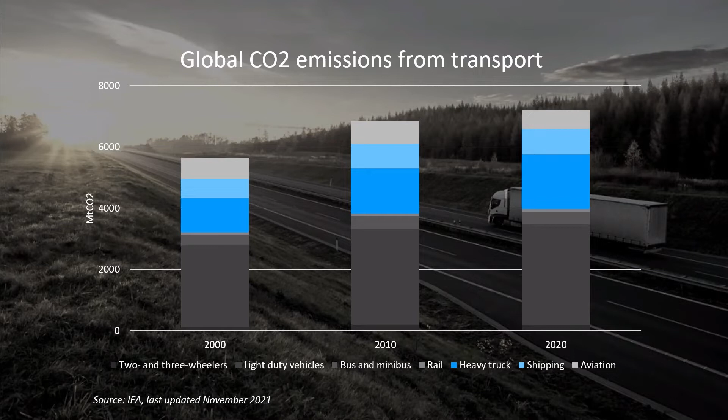The choice to go for bio-LNG has mainly to do with the global CO2 emission. We want to decarbonize the heavy duty transport. What we see more and more is that heavy duty transportation, especially in the maritime and long haul road transportation sector, is very hard to decarbonize. If you look at the CO2 emission for transport, it is increasing, so we have a job to do here.

Looking also at the outlook, we're strengthened by the Gas for Climate report, where we strongly believe that biomethane itself will have a big role to play in heavy duty transport. This also shows that hydrogen, but also biomethane, as a power or in the industry, has a role to play. So I think that bio-LNG itself will get a good place amongst this long-haul transportation.

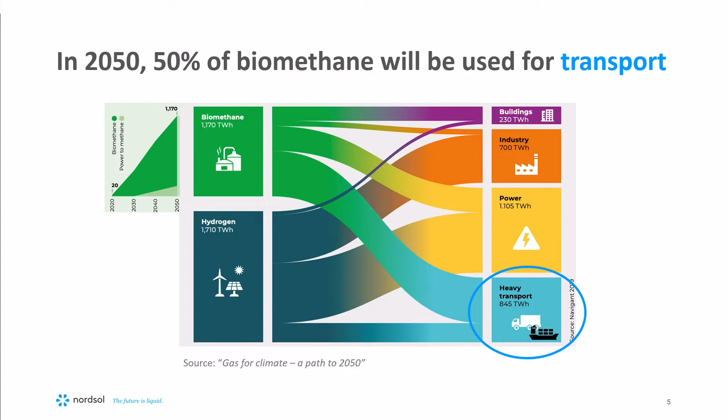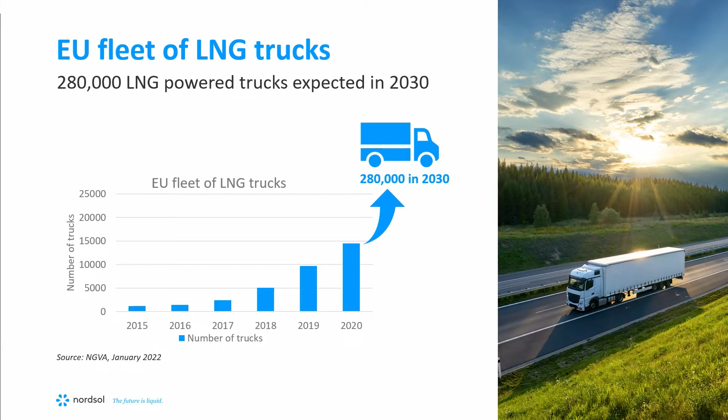Looking a little bit at the fleet on the EU side, we are seeing an increase of LNG trucks. To be honest, there was a little bit of a dip, as the previous presenter already explained with the gas prices, but we still see development on LNG trucks, but also on LNG stations. So the growth figures you see now are slightly delayed, but we still strongly believe that LNG will pull through as a good energy carrier for this.

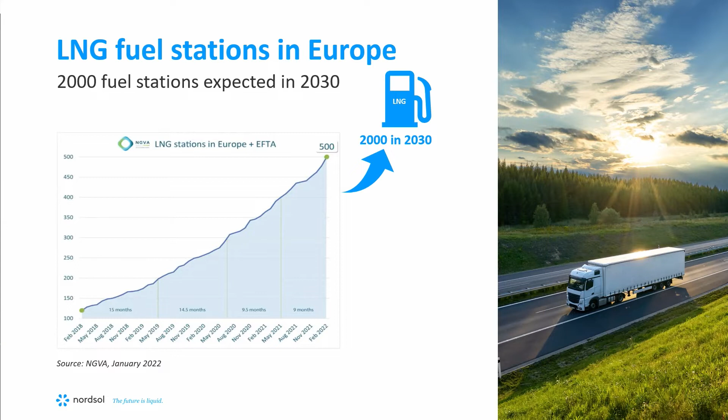And not only on the road transportation, but also in the maritime sector, we see companies like CMA CGM, Hapag-Lloyd, still ordering LNG vessels ready with this dual fuel purpose. So the LNG demand, but also the bio-LNG demand, and the need to blend in renewable fuels in the sector, are still really important topics.

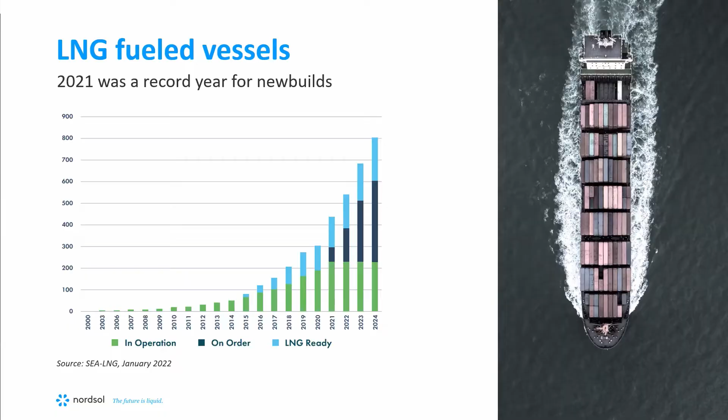This also strengthened us to continue with this decentralized bio-LNG production. What we want to accomplish as a company, the first part is making bio-LNG mainstream. We strongly believe that bio-LNG has a major role to play in the energy transition. And we foresee that the route to bio-LNG, as we presented it here, is a true circular economy.

So our first project in Amsterdam, where we receive the biogas from Renewi, which is a waste company. They collect food waste. What we do there is take in the biogas from the food waste company. We produce the bio-LNG. In this case, Shell is taking off the bio-LNG and putting it into their existing customer network, which is also related to the food industry again.

So what you can see here is a local decentralized economy of food waste to biofuels and then to the trucking industry again. And we also liquefy the CO2. This goes to greenhouses and dry ice production in the area. So hereby we can say that all the products are in a local circular economy.

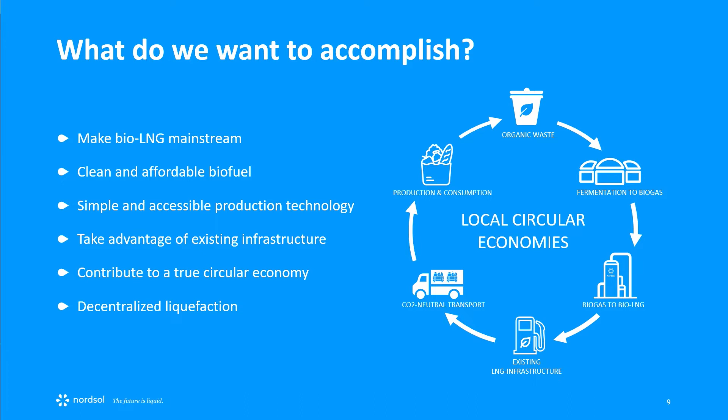A little bit on how we do that. In principle, the technology itself is not new. Liquefaction of natural gas has already been there for a long while. However, there are some big differences which make it interesting to explain a little bit how we did the first technology, or the first plant, in Amsterdam.

So basically we build up the whole system from scratch. What you can see is that LNG from natural gas is normally from the big sites, Qatar, the US, Angola, where gas is a relatively cheap source because it comes out of the ground. In addition, it also has quite a complex gas composition, so you have to think about higher hydrocarbons, not only methane but also ethane, butane, etc. And we're talking about heavy metals originating in the earth - for instance, mercury is a difficult one.

On the other side, biogas is a quite pure gas - we only have methane after the upgrading, and it's a relatively simple gas composition. Of course, you need to remove some H2S, ketones and terpenes, but in general it's a nice clean gas. However, it's also quite expensive to get it because you of course require a biogas site, the feedstock, and the separation part.

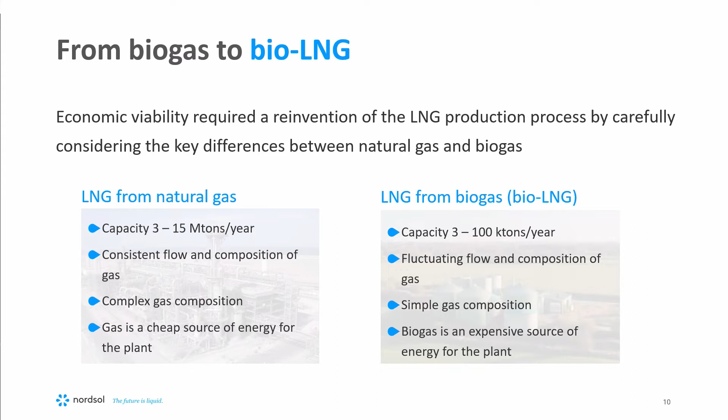So what we did is we tailor-made, let's say, the first bio-LNG plant in the Netherlands on the following concepts. We wanted a high energy efficiency plant, because for us the gas and electricity bill is not for free, so we need the highest energy performance we can get. We need a plant that is easy to operate and also doesn't require a lot of maintenance. So we reduced the interfaces and we are now running unmanned - the plant in Amsterdam does not have any operators on site. Of course there need to be some checks and visual inspections, but in general the plant runs unmanned.

And in order to have the highest carbon footprint reduction, we want a zero methane slip. This was possible through the integrated CO2 liquefaction site. So we liquefy all the CO2, and the remaining methane, which is still originating in the CO2, we strip off and recycle back to the LNG. So there's actually no methane going into the air at the plant.

And like I said, we needed a cost-low impact plant, because if the investment cost runs too high, the business case for small scale and nanoscale bio-LNG will not fly - it becomes basically too expensive. So we require a cheap investment. And of course we want the best possible bio-LNG quality, and I can say this has been verified by Shell in the Netherlands - they are very satisfied with the quality, as it consists nearly of pure methane.

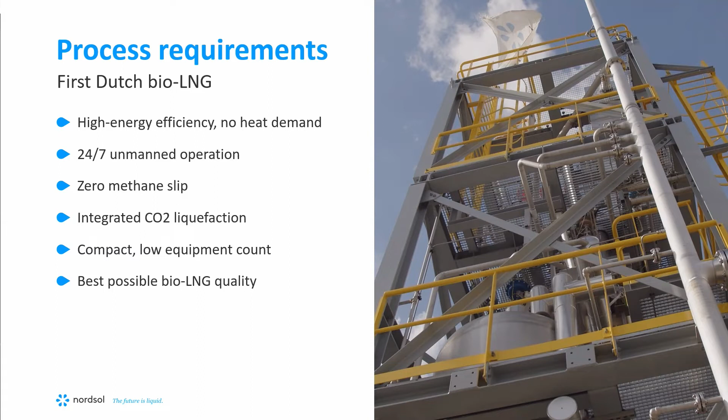So going a little bit into the technology, explaining what we did differently in our plant than the traditional liquefaction sites - as Nordsol, we are taking up from the raw biogas. So we don't intervene with the biogas producers or production sites. We are not knowledgeable about feedstock; we are really good at starting from raw biogas.

So we do the pre-treatment - we remove some water, some sulfur, and other volatile components. Then we start with the integrated technology. What we did here is the upgrading, which is done by membrane, where we separate the CO2 from the methane, and the methane is then liquefied, stored, and offloaded.

On the other hand, the CO2 is going to the liquefaction container, and there we liquefy the CO2. Any remaining methane on the CO2 side is recycled back to the upgrading, and also remaining CO2 on the biomethane side, because CO2 will crystallize if you liquefy it together with biomethane. So that's why we also needed to remove all the CO2, and it's also rerouted back to the bio-CO2 liquefaction. So in this case, the integrated technology is also part of getting the optimized footprint. I'll explain later why this is really important to also have a good bio-LNG price - so bear with me there.

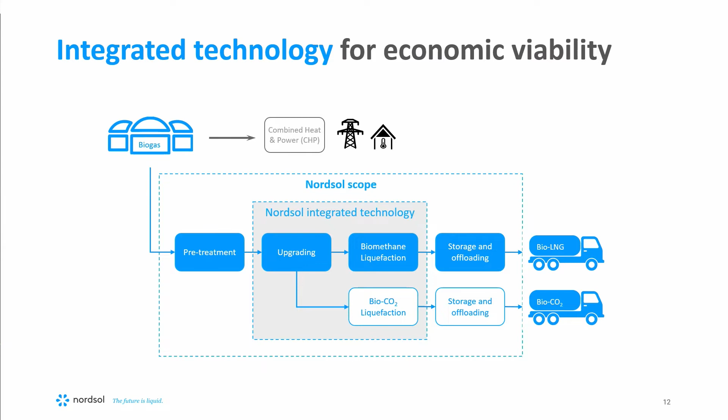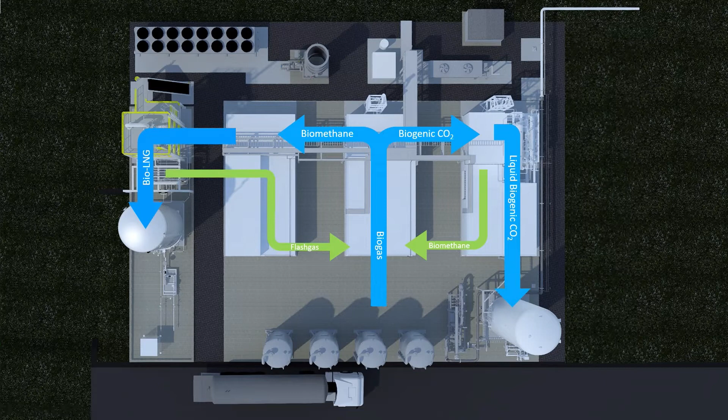So, some distinctive features. Normally, if you go from biomethane, from your membrane step to bio-LNG, then everything will freeze up because there's still 2% CO2 in. What we did actually is develop the technology which we called flash to sweep. In this container, there's an additional membrane step that sweeps out all the CO2. Normally, membranes can't achieve that performance of low ppm CO2.

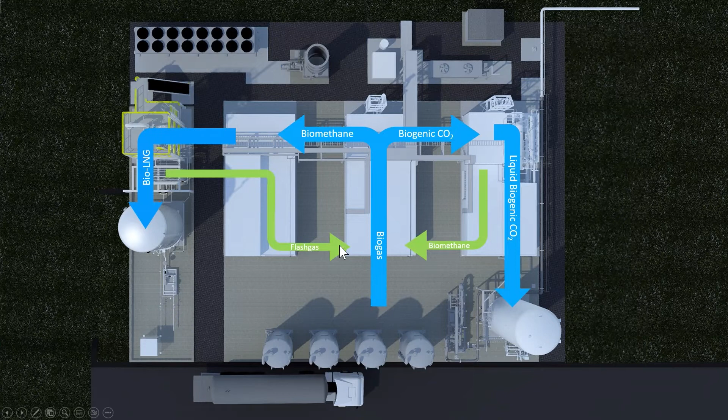However, what we did here is reroute the flash gas to our membranes. So you have the incoming biomethane with some CO2 still in it, and the flash gas is run countercurrent with the membrane sectors. This flash gas has the function to sweep out any remaining CO2 still in the biomethane. At this point, we can clearly state that the methane is roughly 50 ppm CO2 and no water.

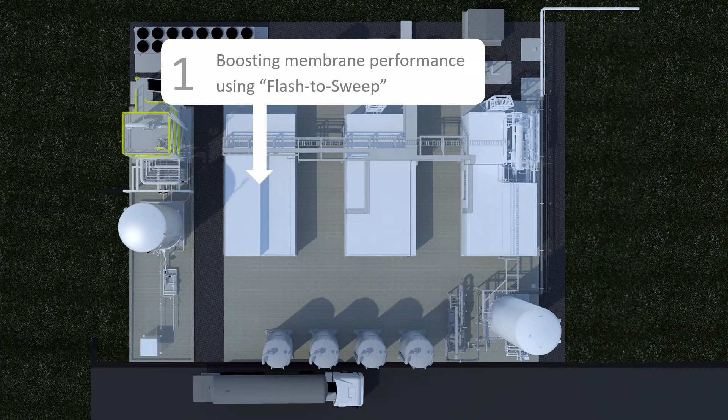And no hydrogen anymore, though there's also a little bit of hydrogen in the gas. At this point, the gas is ready for liquefaction, and we don't need a pressure swing adsorption unit for the polishing or other technologies. So we can go directly from membrane technology to liquefaction. It actually makes life much easier, as a PSA unit has its own interfaces and also requires some regenerative gas. So it saves on energy, but also saves on equipment count.

Then we have chosen for the liquefaction cycle, no phase change in the heat exchanger. It becomes a little bit more technical, but basically the advantage here is that we don't have any liquid formation in the cryogenic heat exchanger yet. This is a common problem in the industry, where if remaining CO2 particles or other particles freeze up in the heat exchanger, it will block the system. So you have to stop production, and of course, if you stop production, it will cost money.

So what we did here is have a separate guard vessel, we call it a guard vessel, at the bottom of the tank where we allow for some solids to form. Normally the biogas fluctuates a little bit in CO2 composition, but also in flow. This helps us, having a guard vessel at the end of the process, to make sure we don't get any clogging and also have good bio-LNG quality.

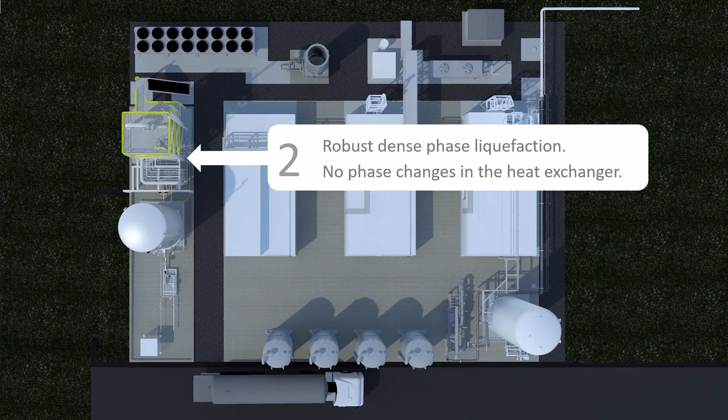Normally you need a refrigerant in your process. You can imagine that if you want to cool down your biomethane all the way to minus 150 degrees, you require some refrigerant. What we did here is use our own treated methane, and the cooling loop is run by our own methane.

We don't consume it, that's a clear statement, but we borrow a part to fill the cooling loop, which is a closed loop used to cool the incoming biomethane. There are benefits to this: if you cool methane with our own methane, you have low energy consumption, and you don't need a mixed refrigerant or nitrogen to do the cooling. So it also saves on equipment, makeup, and consumables on the refrigerant side.

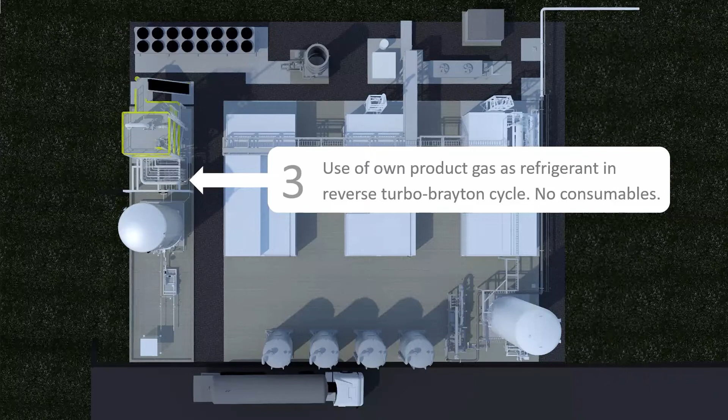We have this three-phase separator as a safeguard, or the guard vessel, which makes sure we can buffer the bio-LNG for a short time. But also if the analysis equipment says the bio-LNG is not at spec, we can evaporate some more off, making sure at this point we can always have a quality check on the bio-LNG. This is important to maintain the right quality for the off-taker and the right quality of bio-LNG for the trucks and the engines.

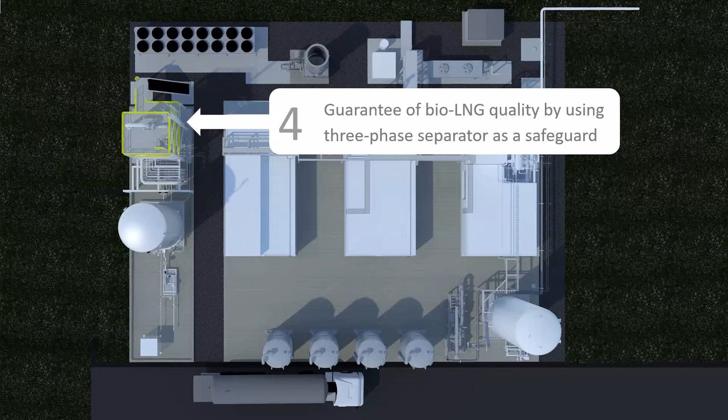Finally, what I already mentioned a little is that we have on the right the CO2 compressor, which allows us to recover all the methane and liquefy the CO2 in the process. So in this compact space of roughly 30 by 35 meters, we can do the whole technology. You can see it here in real life, the plant from above.

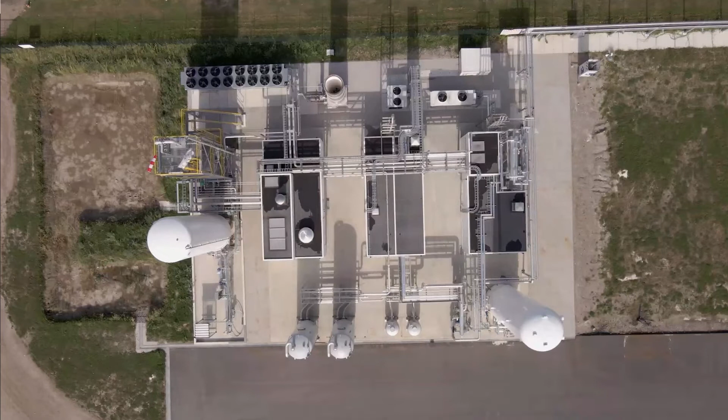You see it's modular based. You can see the containers are split in two, so one part is road transportable, and then in the end you bolt it together. All the items you can see here are built up modularized, and we built the whole site in 2-3 months' time.

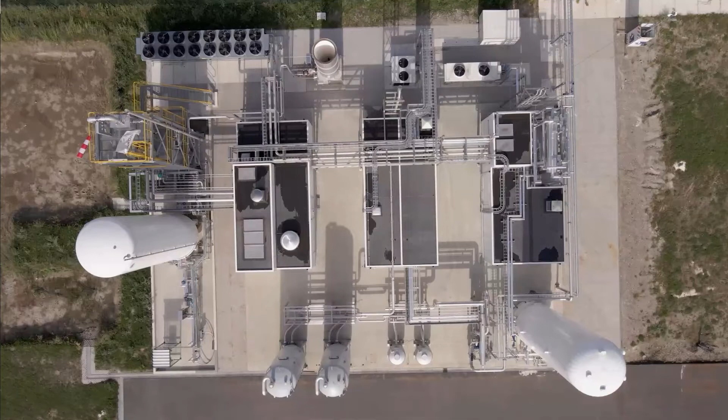Then something about the price of bio-LNG. This has already been touched on in the last presentation. The interesting part of bio-LNG pricing, at least as we encountered it in the Netherlands, is that in every country you see different mechanisms. As the EU, we have the legislation of RED II, and there's a scheme called ISCC where we can certify these kinds of calculations. However, we realize that in every country there's a different force at play, different legislations, and sometimes different interpretation of the RED II or ISCC calculation.

What I'd like to show here is that in the Netherlands, how we do it at the moment is we have a floating contract based on the TTF price, the Dutch gas price, which is basically the fossil LNG price. This is nothing else than the gas price—you can also look online at the gas markets, and we also had the spike.

Then there is what we call a marketing premium. We noticed that off-takers are willing to pay something extra, customers are willing to pay something extra to have the bio-LNG. We got a lot of questions from people saying, hey guys, can we buy some bio-LNG from Amsterdam? And every time the answer is no, because there's no open market for bio-LNG yet.

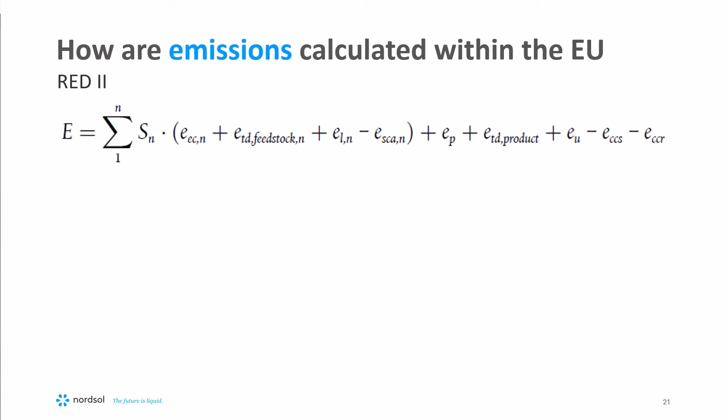So to go a little bit deeper on that, actually the calculation within the EU on the RED II—in Germany, the schemes already apply. So then you talk about the 5 points, which are all in grams of CO2 equivalent per megajoule. You can see here that the total emissions, so your carbon index score, is determining your green certificate price.

And then it becomes interesting because the price per ton avoided, for instance in Germany, has already been up to 400 euros per ton. I think somewhat higher, in the past somewhat lower. But this is quite a big chunk.

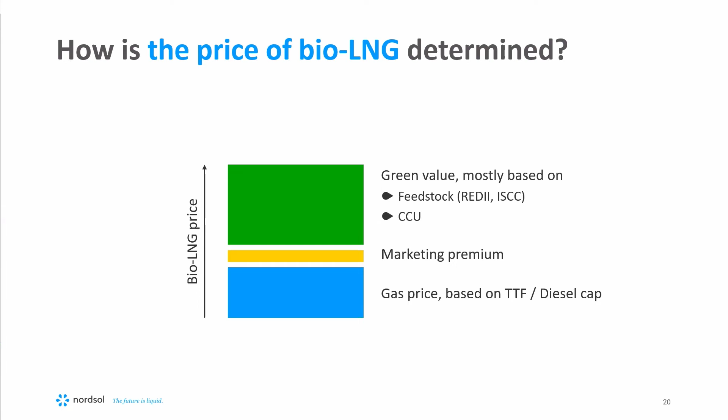So to explain a little bit further, if you have the right feedstock according to the RED II, manure has the highest valuation on this calculated emission score, but food waste as well. So if you use energy crops, you will get a lower score, so also a lower price on your bio-LNG. Feedstock is enormously determining your price on bio-LNG.

And of course, the emissions from processing the feedstock to biogas, biomethane, bio-LNG is also calculated. The transport is calculated, and also the emissions during combustion.

So what we realized is that our plant in Amsterdam, which is certified every half a year with ISCC under the RED II—if we improve the plant, we have a better emission score on number 3, for instance. So what we aim for is as low electricity consumption as possible, which of course helps us reduce the cost, but it also generates more value on your carbon intensity score.

So this is just an example. Everybody can look this up in the RED II directive. But this is a really important aspect of evaluating the bio-LNG pricing for us at the moment, because it gives the highest incentive on the pricing.

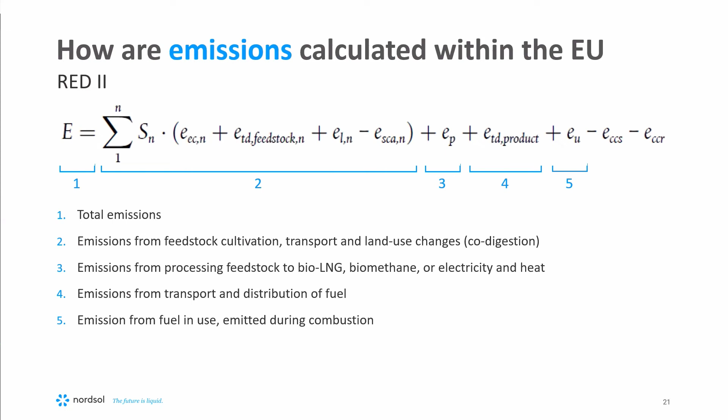So minus 136 is pretty high, because then everything comes from wet manure and you have the carbon capture and utilization in place. So this is where we're aiming at, and we are operating now in Amsterdam more with a figure like this, including the CCU, so roughly at minus 40, but we saw cases already up to minus 136.

So this depends on the biogas composition, which depends on your feedstock, but also on how efficient you run your plant. And we strongly believe that if you utilize this case with manure and food waste, and use CO2 capture and utilization, you can have a really good case on decentralized bio-LNG.

What we do is a 10 ton per day plant, but we're also developing now 3 to 5 ton per day plants. These are leaner and meaner and smaller, but we still believe there is a strong case for decentralized bio-LNG, especially if you're off-grid.

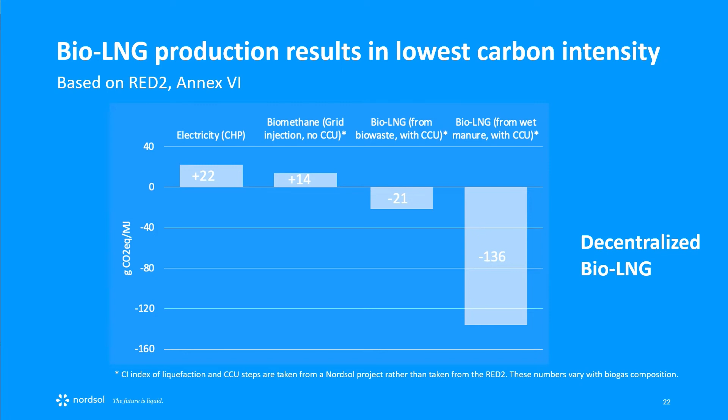So then, going for developing a business model for the first plant, what we did in Amsterdam: we basically were the partner in the middle. We bridged the gap, let's say, from the biogas side to the off-taker side. To be honest, there's quite a difference between a company like Shell and a waste treatment company or a farmer company, and I think you can imagine these two worlds are normally not that easily bridged. But that was one of the challenges.

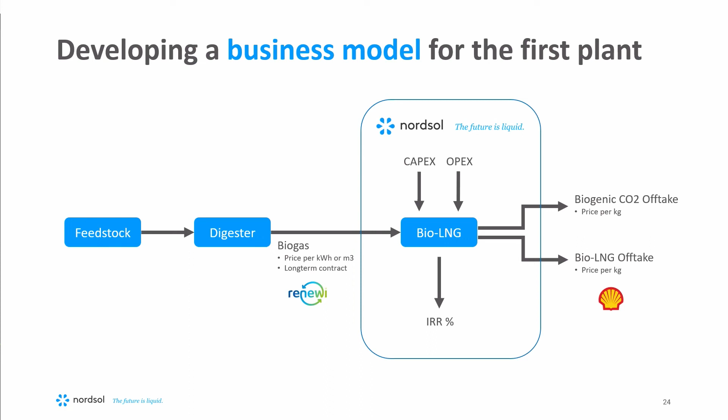So we were in the middle, and actually the client, or the biogas producer, in this case Renewi, they didn't want to invest in a new technology in a new market. We went to Shell and they said, well, we are interested in a new technology in a new market, but we are not going to own the plant. So what Nordsol had to do was lease a plot of land on the site of Renewi, build their own technology, and operate it.

So here we buy biogas from Renewi and we sell bio-LNG to Shell, and we sell CO2 to a client. And this is, in this case, either for ice production or greenhouses, so that's where the CO2 goes.

Here the CO2 physical price is not that big of a value. We started out with roughly 30 euros per ton of physical CO2. It's now run up to 50 to 80 euros per ton because there's a shortage. However, the important one is actually the CO2 avoided. So you have the physical part, which goes to a client, but you also have the emission score because you're liquefying the CO2. That can actually be utilized as green credits, and the green credits in this aspect go to Shell. So Shell is decarbonizing the industry with bio-LNG in this sense.

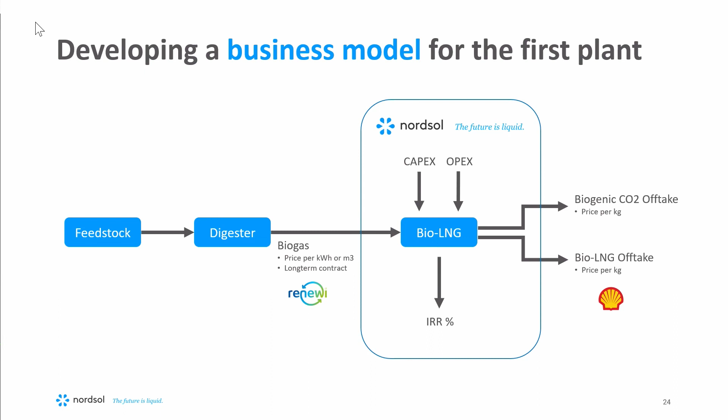Now, to the operational feedback of the plant. We've run the plant now for roughly a year - I think the King opened it in October - and we learned a lot operating the plant ourselves. We're operating now at stable production of 8 to 10 tons per day, and it depends a little on how much gas we get.

We have unmanned operation outside office hours. During the day we're still there to optimize the plant, but this isn't really operational necessity. I think we're spending about 1 hour a day operating the plant, so that's five hours a week roughly, and the rest can be monitored online. If there's a trip, we of course get a push notification that something's gone wrong. But in general, it runs stable.

I think we are running now up to 2 million kilograms of bio-LNG produced in 2022, says 1.8. But I think we ramped up production quite well, so that goes really well. We have a truck loading every other day. Normally the bio-LNG and CO2 can be buffered for 4 days at our site, but we offload every other 2 days. And like I said, the quality of the bio-LNG was well above client spec.

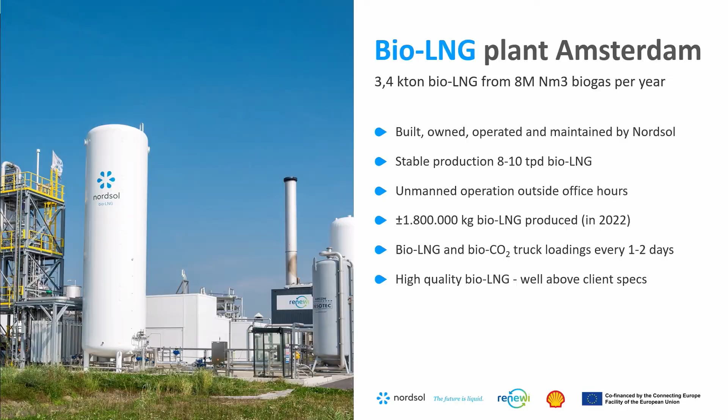So this is the front of the plant, to give you an impression. And what I'd like to state here is that the interesting part of this whole journey is that we're not only a technology provider.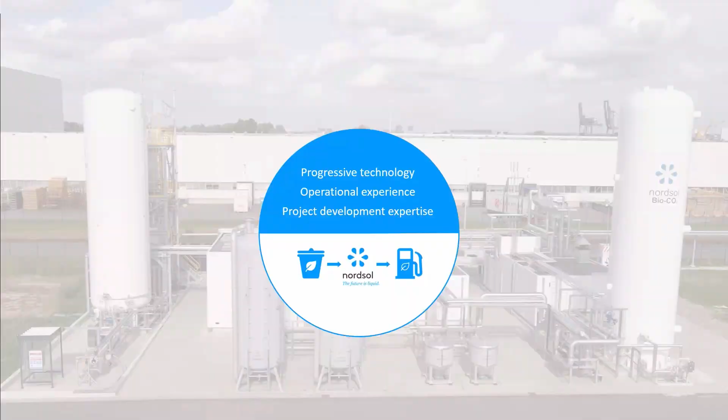We had to ramp up and become, let's say, from a technology supplier to an all-round bio-LNG expert, because we needed to do the permitting, the safety - since it wasn't handled by the fire department either, we had to develop our own safety procedures. We needed information on the certification, the intensity score and ISCC certification. We needed to know about the bio-LNG pricing market too, where we learned a lot.

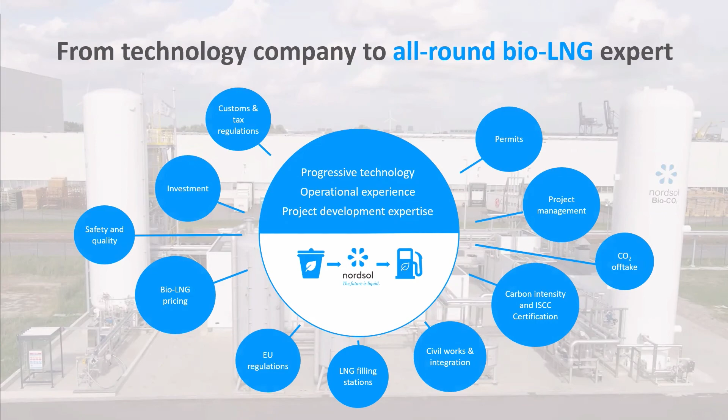What we learned is that if you look at the whole ISCC score, the highest valorization of the biogas, we strongly believe this is bio-LNG. We also know that if you have a grid connection already, for instance in France where biomethane has a high incentive to put it onto the grid, bio-LNG products are not that interesting yet, because the pricing is not as valued as, say, in Germany.

So we see that especially if you're off-grid, bio-LNG offers the highest value for biogas, also for small sites. Of course the return on investment on smaller sites is less, but still you can have a viable bio-LNG case. Partnerships are key.

Looking at what we provided on site, we work with a number of really reliable, good suppliers who already have a lot of experience in membrane technology, biocompressor technology, and standardized vessels. On the other hand, we had a good partner in Renewi supplying us the biogas, and Shell taking off the bio-LNG. So partnerships are really key here, and we are still working on that.

So we are rather working in a partnership or joint venture on a bio-LNG project, rather than ending up in tenders and long dragging comparisons, because in the end there's more than enough opportunity for bio-LNG, biomethane, and in the future also hydrogen. It's not like we have to fight for work - there's so much to do, and I think everybody can be a part of it.

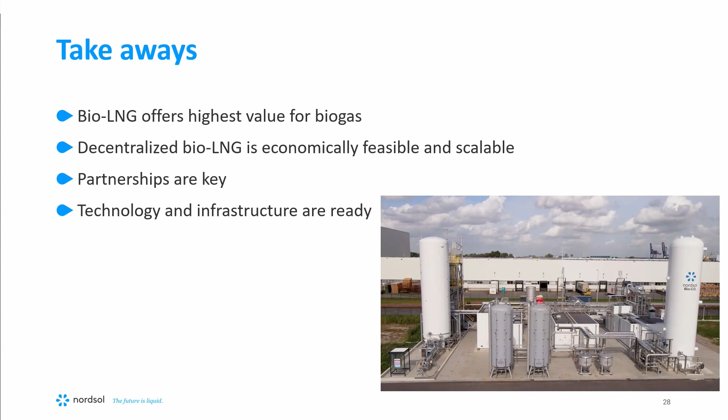I think that's the story of today. If there are any questions, I'm happy to answer them. Thank you for your time and attention.